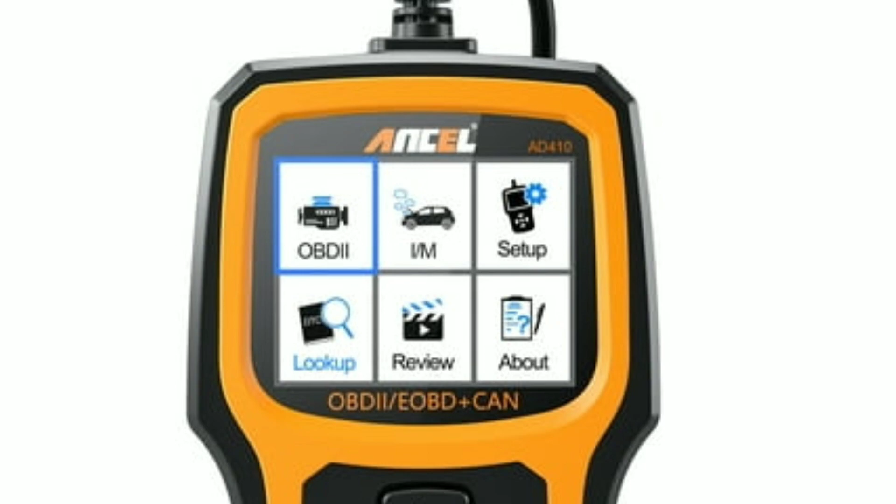Today, we've got something exciting to talk about: the ANCEL AD410 Automotive OBD2 Scanner. If you're a gearhead like us, you know the importance of having a reliable OBD2 scanner in your toolbox. In this video, we're going to take an in-depth look at the AD410, its features, how to use it, and why it's a must-have for every car owner.

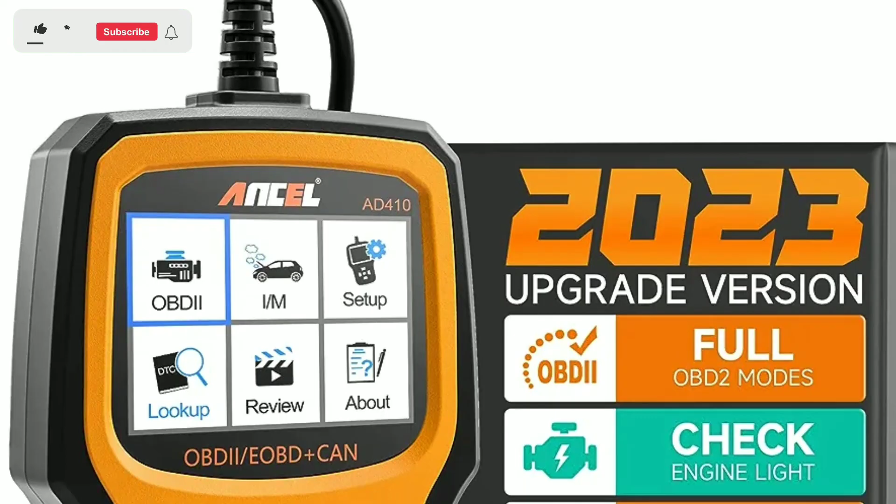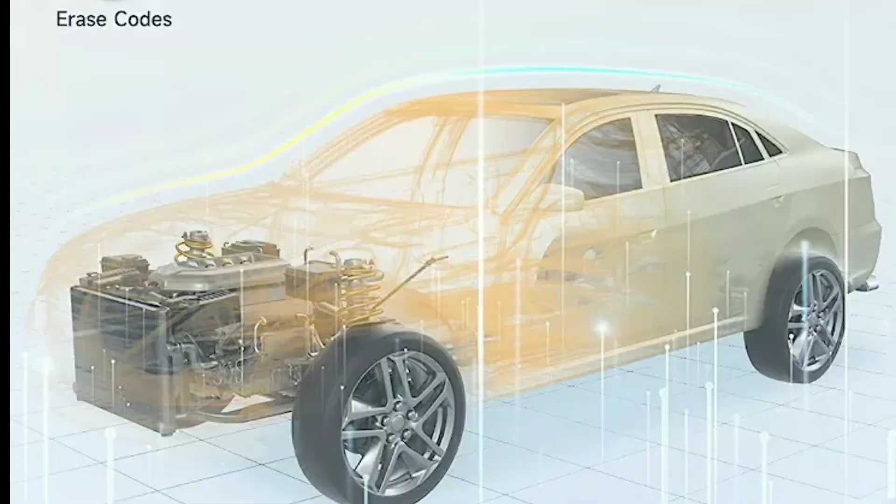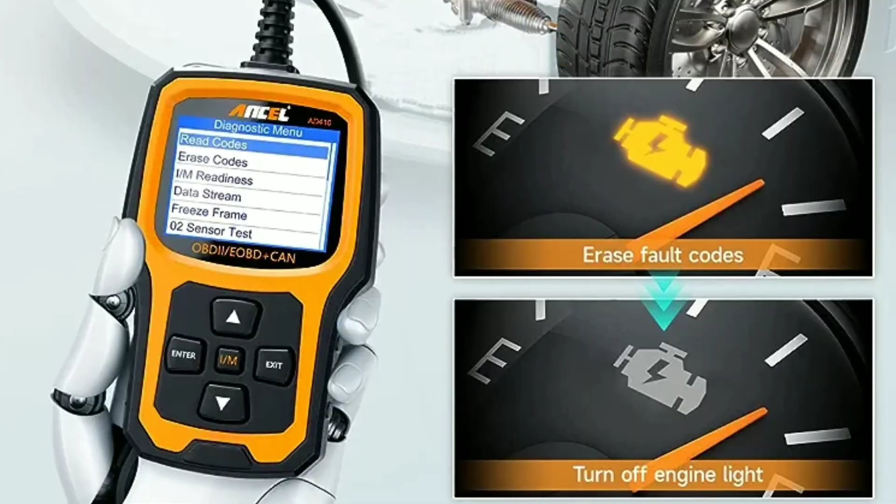The AD410 is not just any OBD2 scanner. It's packed with features that make it an excellent tool for both beginners and experienced DIY mechanics. It's compatible with most OBD2 compliant vehicles, which means it works with cars, SUVs, and trucks manufactured after 1996 in the United States and 2001 in Europe and Asia.

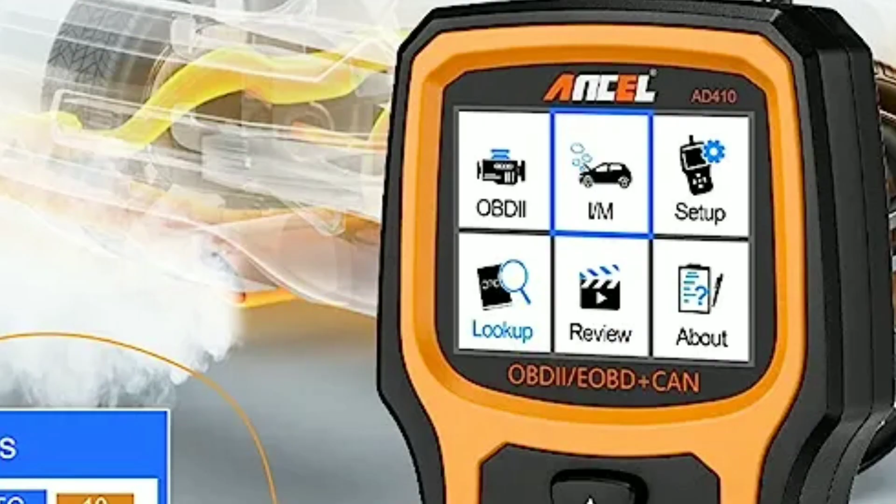Now, let's get into the nitty-gritty of the ANCEL AD410's features and functions. First, large display. The first thing you'll notice is the large, easy-to-read LCD screen. This screen displays all the essential information, making it simple for anyone to understand the data.

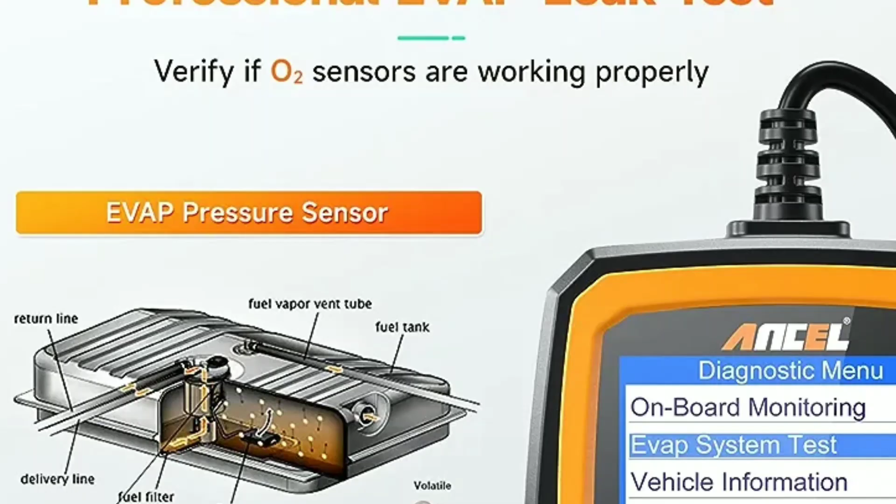Second, code reading. With the AD410, you can quickly read and clear trouble codes from your vehicle's computer. These trouble codes can give you insights into what might be wrong with your car.

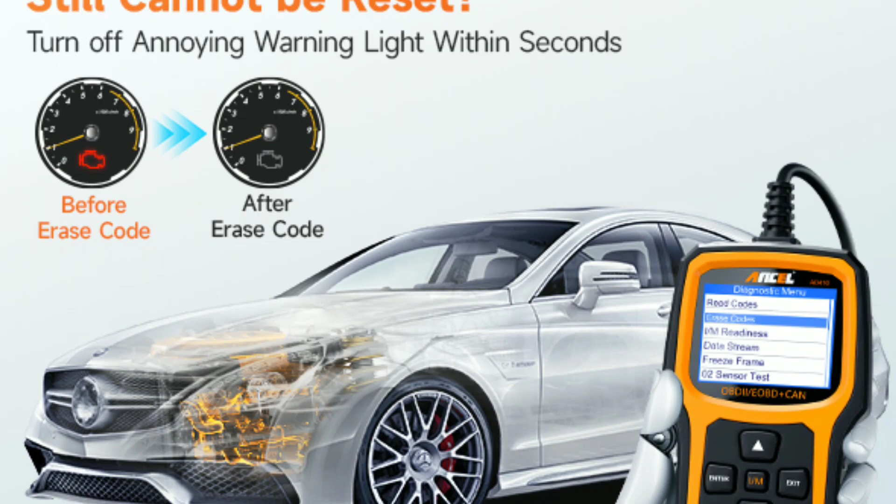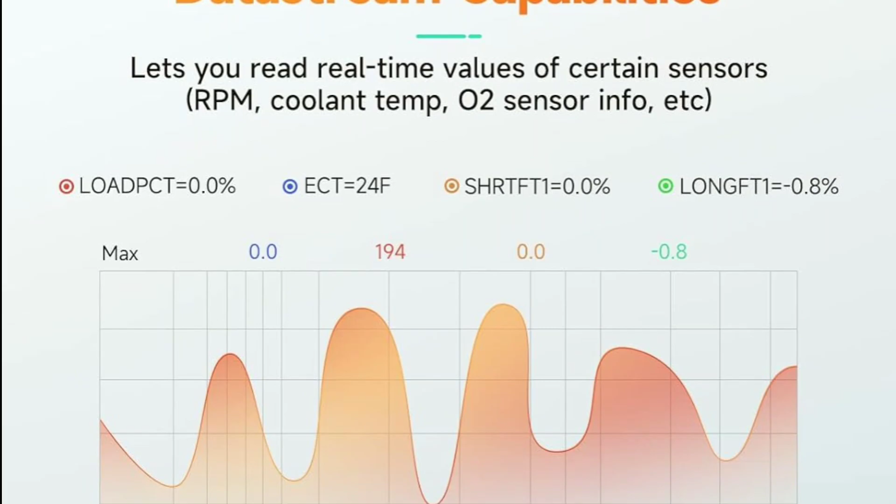Third, live data stream. The scanner can display real-time data in the form of graphs, helping you monitor various parameters like engine temperature, RPM, and more as you drive.

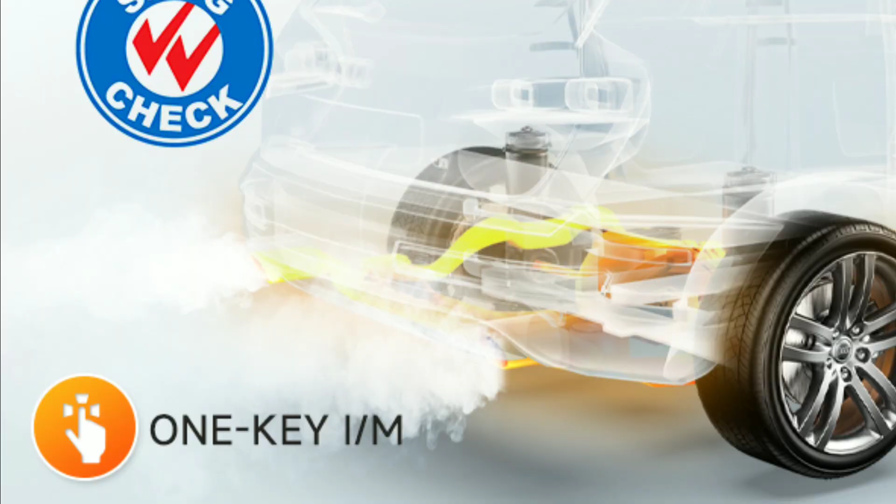Fourth, I/M readiness status. Checking your car's I/M readiness status is a breeze with this scanner. It tells you if your vehicle is ready for an emissions test, which can save you a lot of time and hassle. Fifth, battery voltage check.

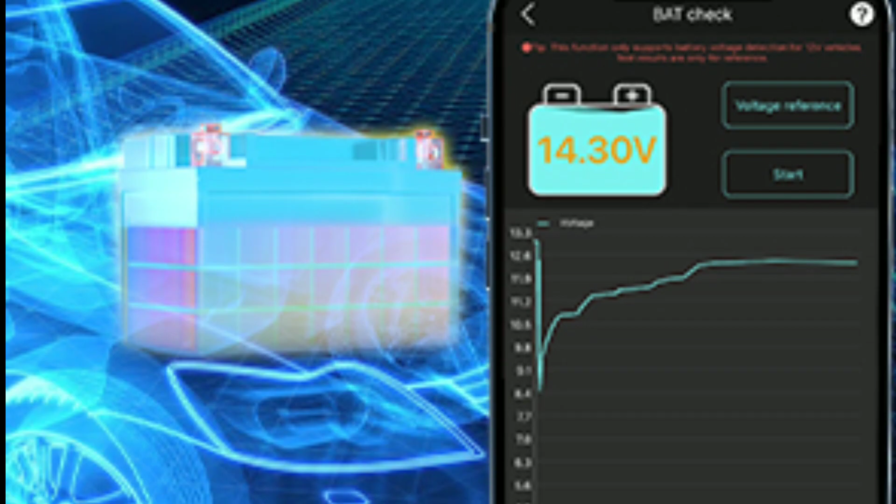Another useful feature is the battery voltage check. It helps you keep an eye on your car's battery health, preventing unexpected breakdowns.

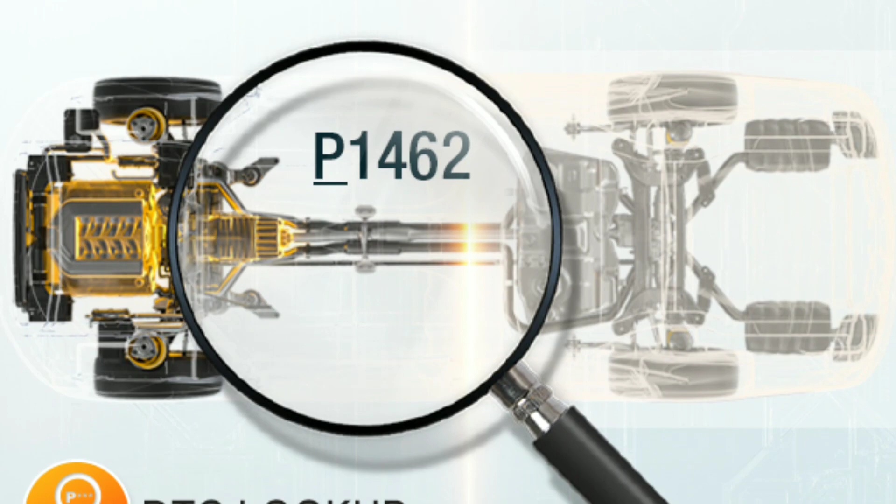Sixth, built-in DTC library. Even if you're not an automotive expert, the built-in DTC diagnostic trouble code library provides descriptions of trouble codes, making it easier to understand what's going on with your vehicle.

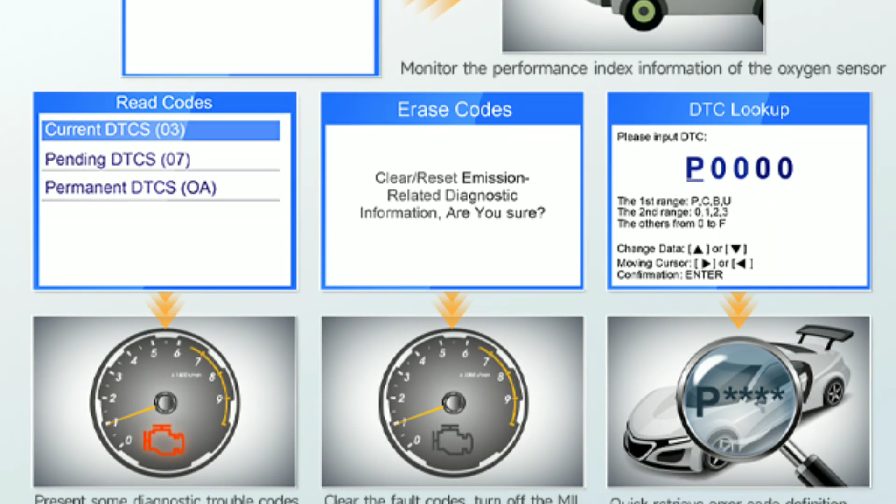Now, let's talk about how to use the ANCEL AD410. Trust me, it's as simple as one, two, three.

First, plug and play. Locate your vehicle's OBD2 port, usually found under the dashboard near the steering column. Plug the AD410 into the port, and it will power on automatically.

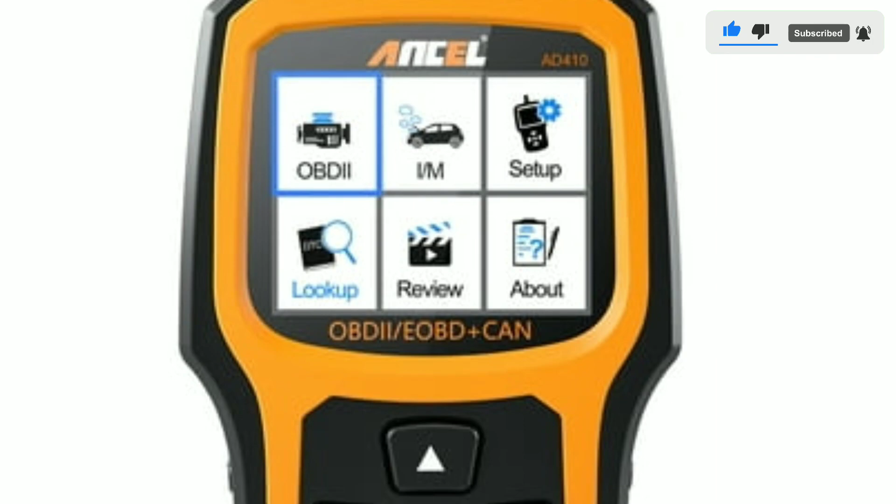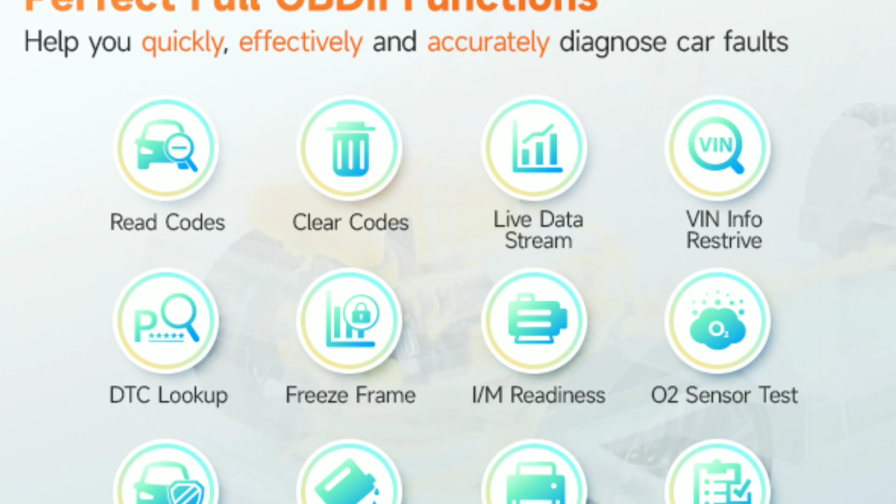Second, navigate the menu. Use the intuitive menu system to select the function you want. You can read and clear codes, view live data, or check your I/M readiness status with just a few button presses. Third, interpret the results.

Once you've performed a scan, the scanner will display the results. If there are trouble codes, write them down or take a picture with your phone for reference.

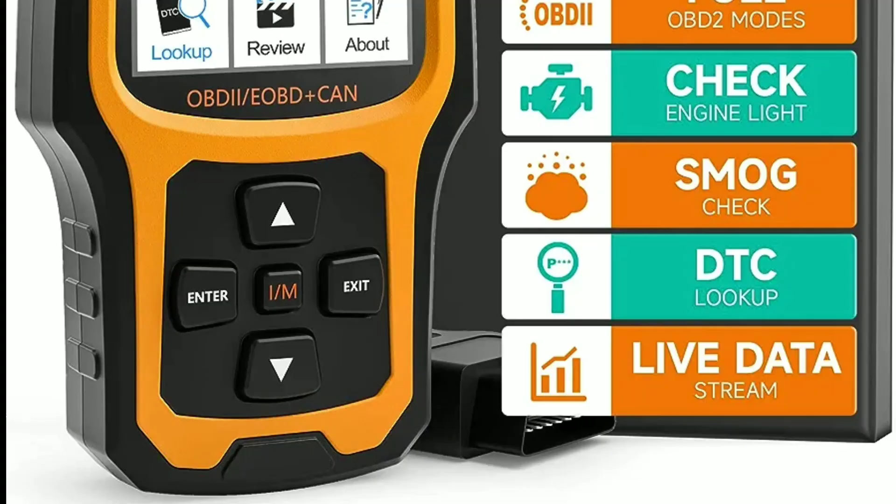Now, you might be wondering, why do I need the ANCEL AD410? Well, let me give you a few good reasons. First, save money. With the AD410, you can diagnose issues on your own, potentially saving hundreds of dollars in diagnostic fees at the mechanic.

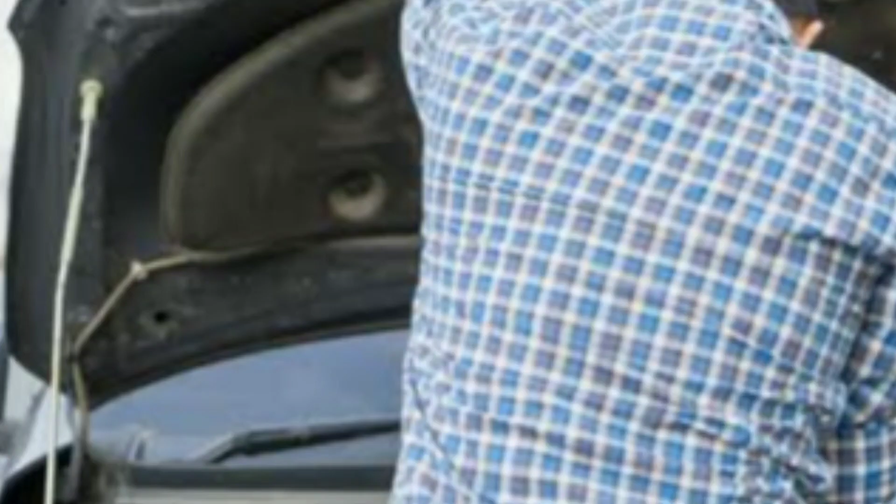Second, peace of mind. Knowing what's going on under the hood gives you peace of mind. You'll know when to address a problem before it becomes a costly repair.

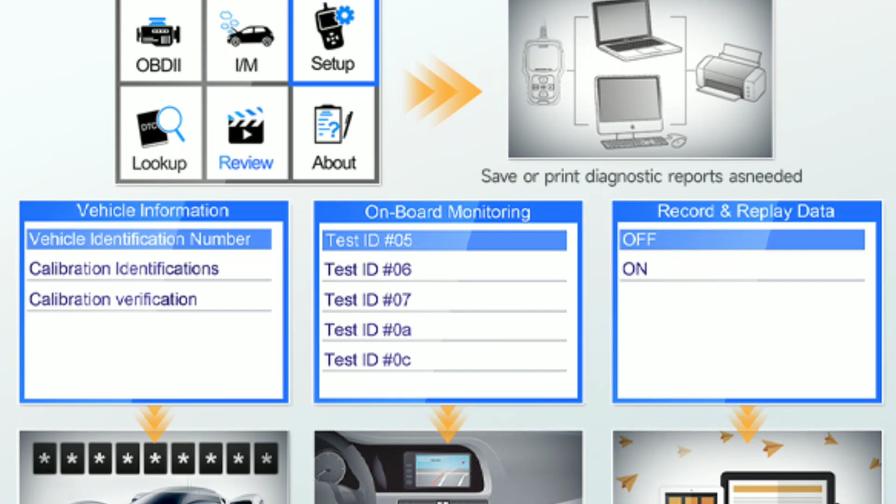Third, emissions testing. If you live in an area with strict emissions testing requirements, the AD410 helps ensure your vehicle is ready for inspection, reducing the stress of passing.

Fourth, quick fixes. For DIYers, this scanner is a game changer. You can identify issues and make quick fixes without guesswork.

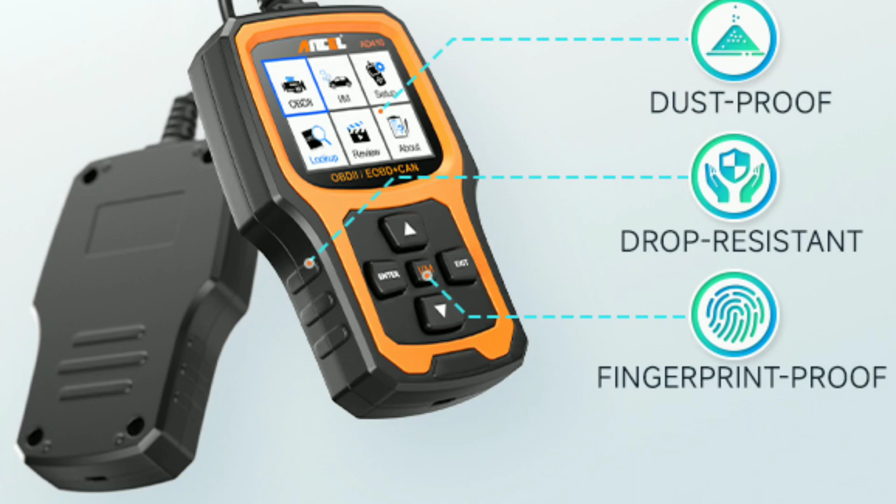The ANCEL AD410 Automotive OBD2 Scanner is a valuable tool for any car owner, whether you're a novice or a seasoned gearhead. Its ease of use and comprehensive features make it a must-have in your automotive arsenal.

Final thoughts: so, if you're serious about taking control of your car's health and saving money on repairs, consider getting the ANCEL AD410.